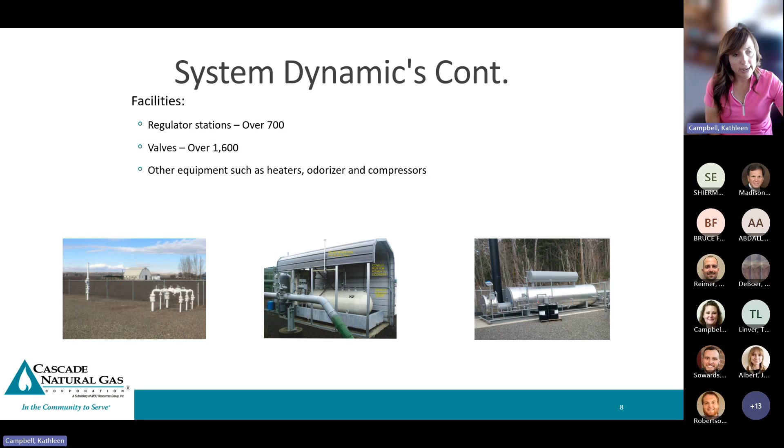In addition to pipe, we also operate a diverse range of facilities. So those facilities include regulator stations, valves, and equipment such as odorizers, heaters, and compressors. So here's some photos of some of the facilities, things we're doing maintenance on, also looking at sizing on, making sure they're meeting all of our needs.

And then to get us a little further into understanding our system, this is a high-level example of our systems and our dynamics. So this is very high level. In green, that is the interstate pipelines where Cascade Gas receives our gas from. Typically for Cascade, that's TransCanada or Williams Northwest Pipeline. From those, we have gate stations. They're basically taps off the interstate pipelines. At those gate stations, Cascade Gas takes over pressure regulation and will odorize the gas. And those systems feed our distribution system. So it's the start of our system.

In red, those would typically be our high pressure lines. So downstream of gates, we typically have high pressure lines. And those high pressure lines will feed our regulator stations, which feed distribution systems, which are in blue. That feeds our residential and commercial loads. And then also we can have some industrials, and those can be either off high pressure systems or off the distribution system. So that's just a high level look from our tap all the way down to the service on your house.

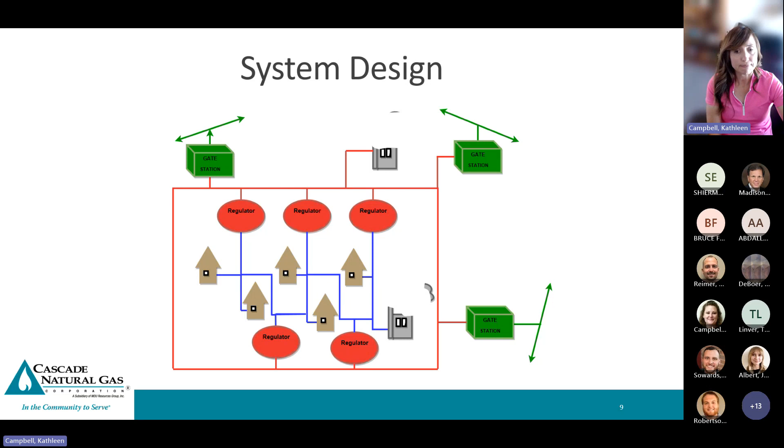The main tool we use to model our distribution system is Synergi Gas. This model is supported by DNV. Our Synergi Gas models incorporate our total customer loads and all of our piping and system configurations, which would include regulator set points, size of those facilities, things like that. Synergi Gas is an industry-used hydraulic modeling software that predicts flows and pressures on systems based on gas demands. Typically we use them for peak weather events, but you can actually use Synergi to model any weather event. And we'll go over some of that.

And then for Cascade Gas, our models are really important. So we rebuild them and validate them every 3 years, and then we maintain the models between rebuilds. So a great tool and resource that we put a lot into to keep accurate. And actually right now we just completed Cascade's 2023 model updates. So for this IRP, we will be using Cascade's new models. They got rebuilt and validated, and they're getting used by engineering, and that'll be what we do our 5-year growth modeling with. So exciting news that we got the models in time for this IRP.

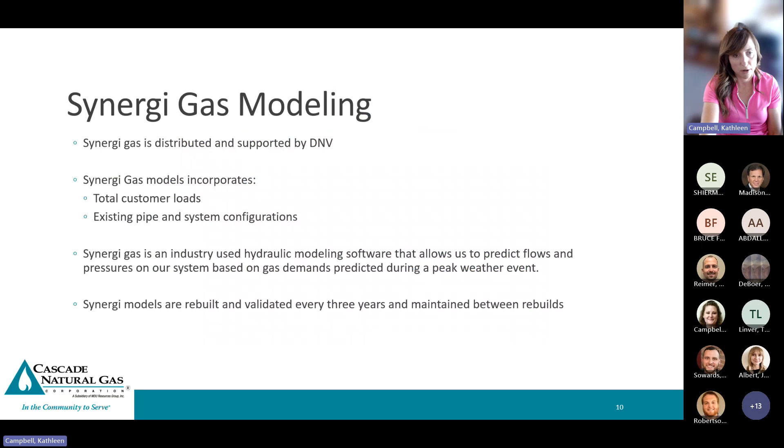And then this is that in Synergi. So you can see the reg stations, the piping, all the same. It feeds from GIS, so it's really accurate and up to date on everything that's been added to our system. And then one note I'll make is each of our systems are unique. They can be unique in the customers that are served and the pipeline characteristics.

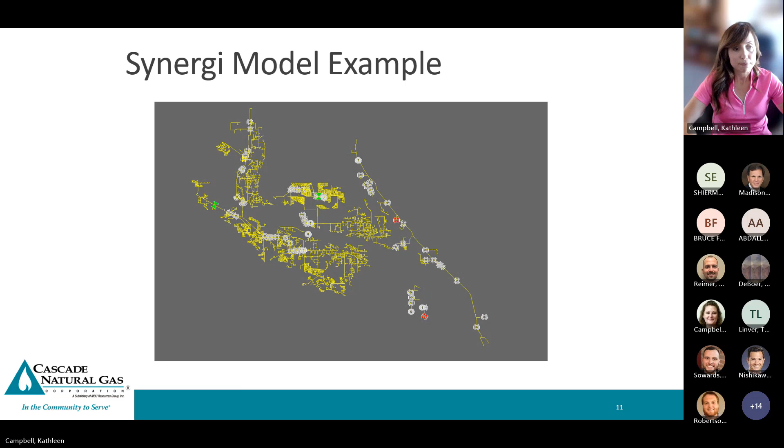Hey, Kathleen, just jumping in to let you know, 3 hands have been raised. So I just wanted to catch you before we moved on. Oh, okay, thanks. Let's pause. Go ahead, Byron. Hey, Byron.

I can't hear you. Is it me or did we lose something? Can't hear Byron either. Okay. I thought I maybe lost my connection. I was about to freak out. Can you guys hear me now? Did that work? Oh, yes. Yeah, we can hear you now. Okay, sometimes you just got to turn things off and turn back on again.

Okay. So Byron Harmon here from Washington UTC. I want to start by apologizing that staff didn't get its pre-tag feedback back to you guys in a timely manner. But could you go back to slide 7, please? Okay, sure.

So in previous staff comments, we had raised some concerns around hydrogen embrittlement with steel piping. I don't know what the literature says around polyethylene and hydrogen embrittlement. Is that a thing? Have you guys investigated hydrogen embrittlement with polyethylene pipes?

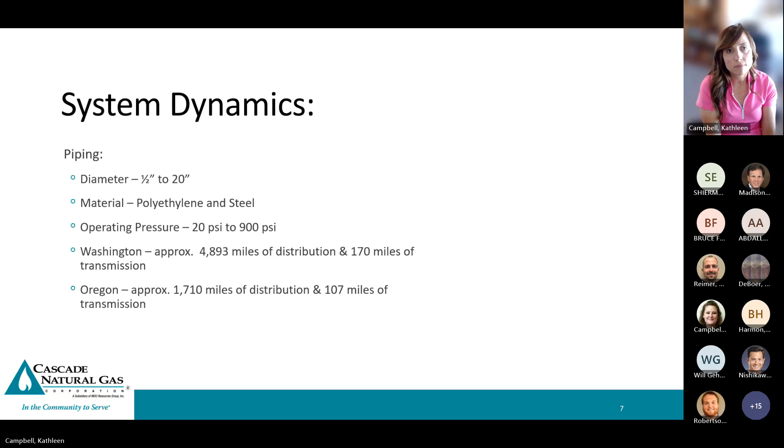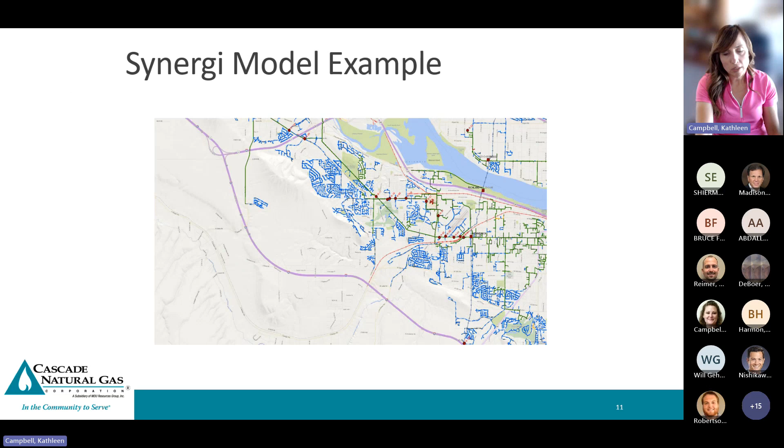I'm gonna try and figure out what slide we're on. Keep going. I think we're on this one. Yeah, I think we're wrapped up though.

So now we're going to get into our model building process and go over a little more detail on that. So when we rebuild our models, we take our current GIS data to do the spatial rebuild. We also export out our current CC&B billing data, and that data goes into a module called CMM, which is Customer Management Module, which is kind of a Synergi interface. The program takes our CC&B data to make an updated demands file.

And I'll touch on that a bit in the next slide too, but basically when we take the CC&B data, we take 5-year billing data. And in that 5-year billing data is up-to-date usage on the customer. So if the customer changed or their habits changed or their equipment changed, maybe they did some energy efficiency programs, things like that. So it's up-to-date billing, which is good. We want the best representation of loading on our models.

And then once we get that built and those processes done, we go through and we validate and calibrate. Validate and calibrate is kind of the same thing, but we validate each model to a recent low-pressure event. And we basically see how well our model that we built is performing to our existing data.

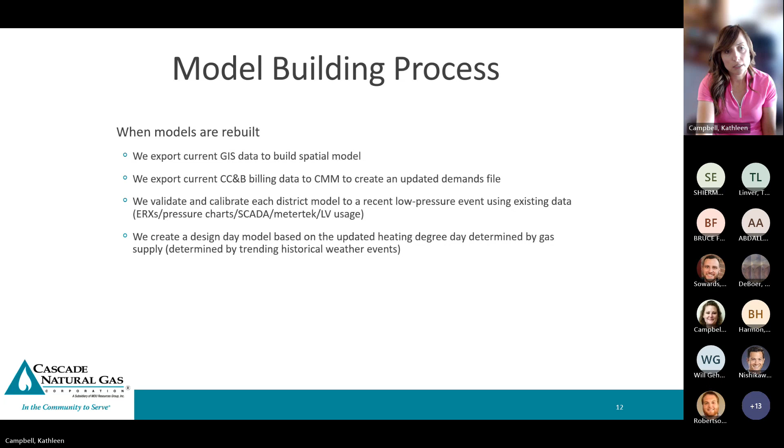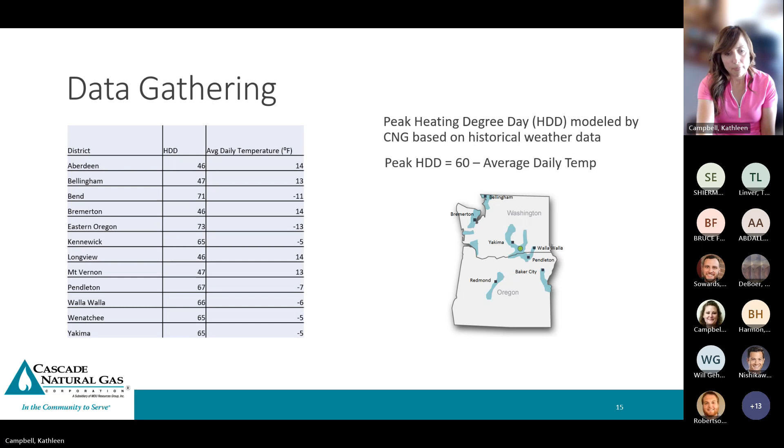And then with that, just touch on customer management module, CMM. So like we said, we get our CC&B data, it comes into CMM. It brings all our data in and basically makes the demand files. And those demand files apply the load spatially in the model. So in our Synergi models, some of it has to do with file size. We don't model each service line. We typically put service lines spatially into the pipe loads.

And there's just less data points. So when it goes to run, it's a little more efficient from a data management perspective, and it makes the program run faster. So that's what CMM does. We just put all of our meter demands into the pipes. And that's basically what CMM does for us.

There we go. So now we're going to talk how we get from a verified model up to a peak day model. So typically this load temperature relationship will come from CMM for us. And basically as your degree day increases, which means it's getting colder, you typically need more heat. Customers typically use more space and water heat. So as we get colder, more heat. And this is basically a linear relationship.

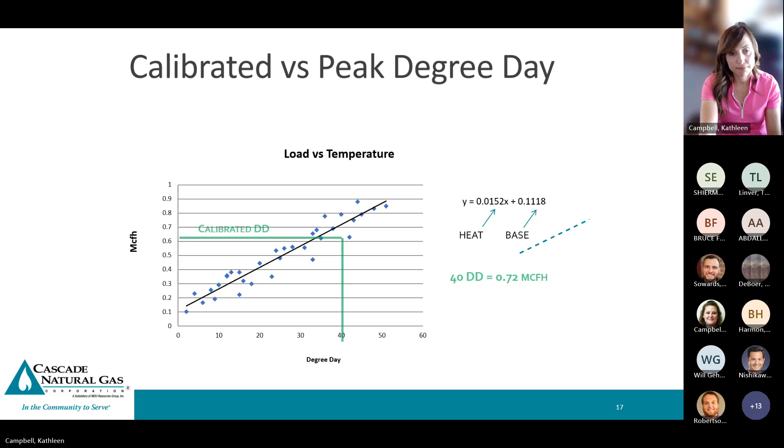Okay, any other questions? I was actually pausing because this slide normally gets a lot of questions, or we usually have good discussions on it. Okay. We can always come back there. So we were just getting to this one.

So with our models, we spend a lot of resources on getting our models really accurate, with the most accurate data we can have, rebuilding them frequently. And these models really are a great tool for us. We have lots of capabilities. Every day our engineers use our Synergi models. They review large customer requests. We model our RNG. It supports design and sizing of pipe and pipeline components.

We use them for future planning. We're going to use them to model our IRP predicted growth. We use them to identify the deficits. Operations support is another one on here, and system reliability. And then we optimize our distribution system enhancement options with the models. So it's a great tool and resource.

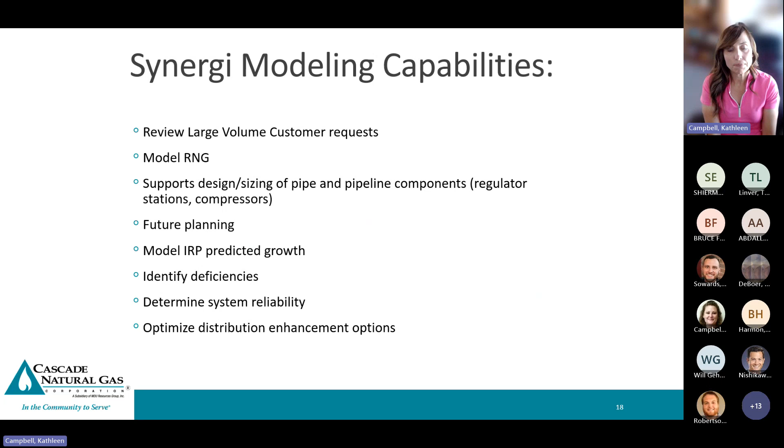And then I'm going to touch on demand side management. We've kind of talked about this, and maybe this slide is out of order, but it's okay. Since we're going to model out our 5-year growth, that growth includes energy efficiency programs, or if we have some demand side management planned, that would be built into our 5-year predictions. Also, any energy efficiency or demand side management efforts that have been completed would be incorporated when we rebuild the models.

So with that window of looking back and getting the most recent 5 years of CC&B data, you capture your energy efficiency programs or other efforts, or if customers changed equipment or whatever happened on the customer side for their usage. Another thing is it could be considered as an alternative to address a deficit. So we could also model demand side management in the Synergi models.

And then I've got an update. This one's kind of exciting. Renewable natural gas modeling update. Kathleen, we have a question on the last slide. Oh, yeah, go ahead. Sorry about that. The way that you described it just now, and I want to make sure I'm not misunderstanding, it sounds like a lot of your growth predictions are based on historical data. Is that accurate?

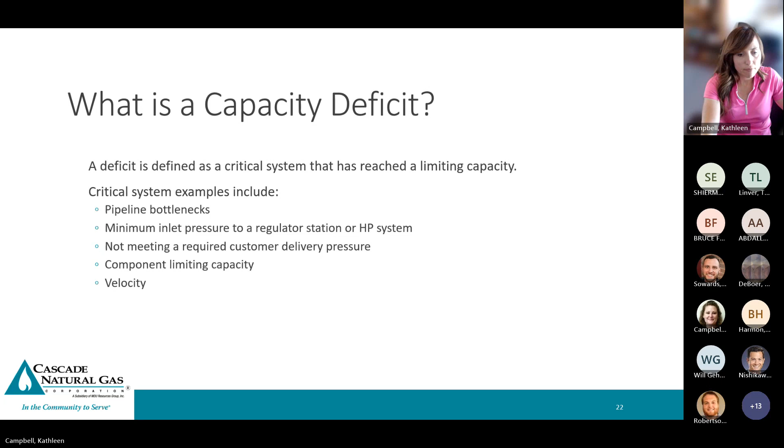So this actually is the growth modeling, what I'm just going to cover. So this kind of builds us into our deficits. I think I mentioned this. I think this might be the one we come back to, and there might be a question. We'll see where we go. I'll present and then we can see if there's questions.

So we model out our 5-year growth predicted, kind of like we were just talking with Brian and our philosophy on that. So we take that 5-year growth that we get from regulatory, and then we add that to our design day models to determine if and when a capacity deficit exists. And then I'll get into this a little bit.

So I think this was the question I'm recalling: you were asking if we had negative forecasts, and how Cascade's growth predictions have changed over time. In some of our areas and towns, I know I've seen we have had no growth, or the prediction in 5 years is the same as what it is right now. I can name one of those as well.

I think Othello. So the Othello gate was one of them I noticed, and it's kind of becoming more common, it's happened in the last couple years. It's been kind of surprising to see no growth in certain areas, for whatever reason, economic, lots of things play into those. But yeah, does that work, Brian? Before I move on to the next bullets, we can talk about that too.

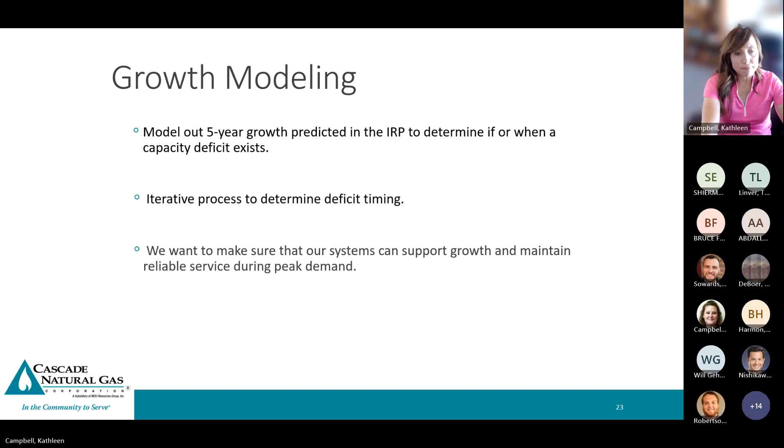And really the whole goal of it is to make sure we can support all of our growth and just maintain our reliable service during our peak demand events. And then with that, once you put the growth models on, like I've been mentioning, we do our system review. We do a comprehensive review every 2 years as part of the IRP. And then we also do yearly reviews with our budget cycle, so typically we're doing reviews on an annual basis also.

And then if any deficits are predicted, we evaluate, propose reinforcements and enhancement options, and go through alternative analysis. And then typically we'll work with management to get those into the capital budget based on the timing needs that we've determined with modeling. And next, now that we've covered the point that gets us to the alternatives, I'll go over our options and our alternative analysis in more detail.

So with enhancement, we've kind of talked about this, but here are some of the options for pipelines. This is just to get everyone talking the lingo to set us up for our next meeting. We have things called reinforcements, replacements, loops and backfeeds. Could be pressure increases or upgrades. Typically, these will gain capacity. We can also upgrade facilities. That might be replacing the whole facility, replacing a part in the facility, things like that.

Another option we have is we can always add reg stations to a distribution system. Typically, a reg station is a fresh source of gas. On distribution, they typically will serve 60 pounds. So if you have a system, let's say the east side of town has low pressure, if you run a reg over to the east side of town, typically you can boost pressure productively by adding another reg station, having a fresh feed of 60 pounds into the system, or a loop, with 2 regs feeding the system too. You can also do strategically placed gate stations, and you can also add compressor stations where feasible.

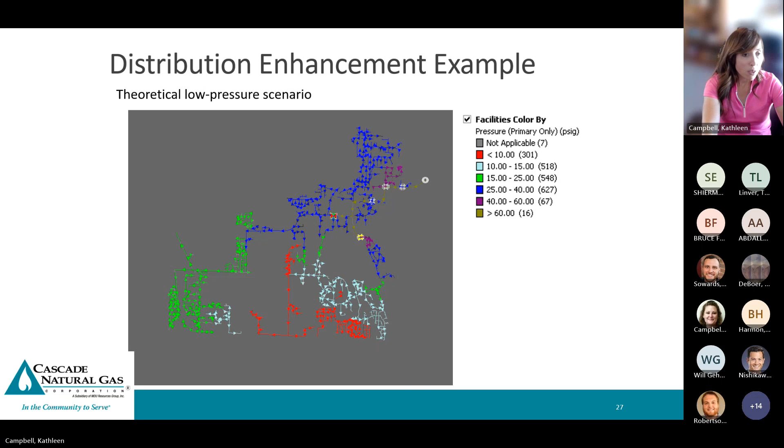So both the regs I noticed are on the east side of town. One option, if you brought a reg over to the west, that would probably help it. Or even to the south. Or you could do some looping. So you can go through, and this slide's animated. Some things might be unfeasible, like I noted a compressor station. So regs, there's the two regs. What can we do? Here's some pipes. So these are two good piping loops.

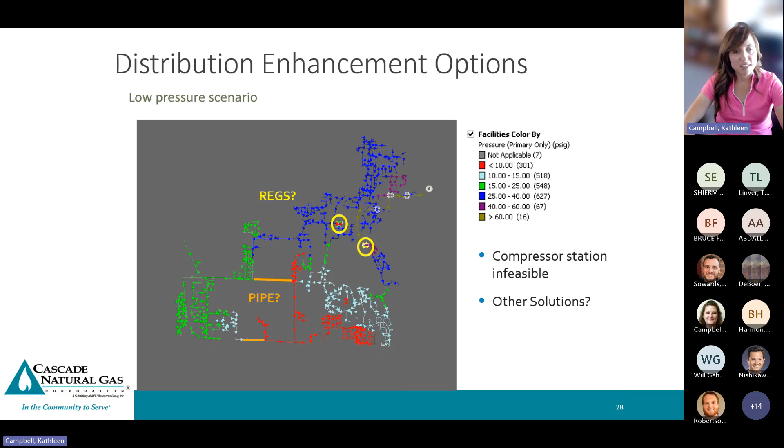And I guess with Synergi and our engineers, things might work in Synergi, but one thing we always want to be careful of is that it's constructible. So in this example, the middle pipe looks really good, but it actually runs through an airport. So things can work in Synergi, but they also need to work in the real world too.

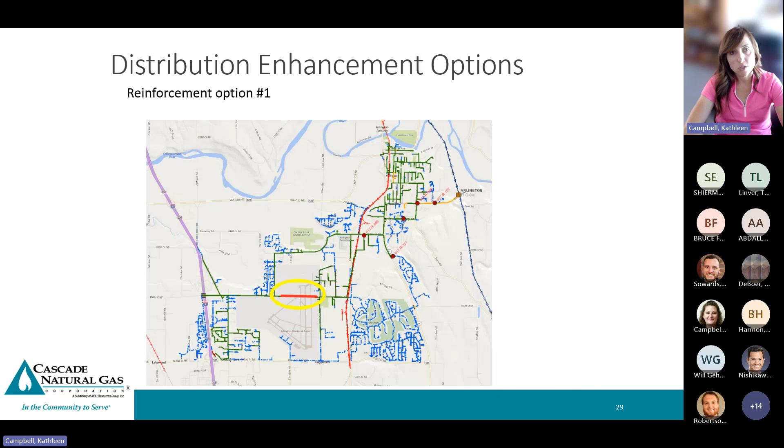So as we go through alternative analysis, we typically model out some things and then we'll look into if they're constructible, practical, and go through our alternative analysis criteria, which we'll be covering in a minute. But a good example here. So in this example, the lower loop is constructible, so that would be the option you would choose.

And then it's important that we don't want to overbuild areas. So you'll notice we just brought this back up above 10 pounds. So whatever your design or your deficit goal is, we want to do the least cost option.

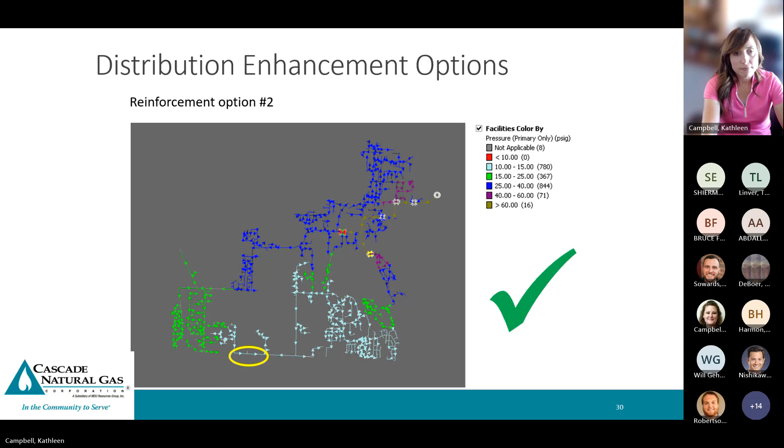So that works through the example, but once we have those deficits identified and we have a couple options modeled, we'll go through how we do alternative analysis, and we'll look at scope, cost, capacity increase, timing, system benefits, maybe long-term planning comes into play. Work through alternative analysis and then also environmental impacts.

So environmental impacts could be things like if the pipeline route goes through wetlands or an archaeologically sensitive site, things like that you maybe want to avoid. And then each enhancement option will have different pros and cons. So we weigh them out. And there might be several factors why you select one alternative over another.

So now I'm going to cover how we review and select projects to our capital budget. Hey, go ahead. Kathleen, we have a question. Okay. So Byron here again. Going back one slide.

Has Cascade started looking at how to develop any equity enhancement considerations? So looking at demographics of communities that are impacted, property owners, renters, or for example, equity-based environmental impacts. So if a particular community might be overly burdened by a compressor or something and they happen to be a historically marginalized community, does that factor into any of your analysis? Have you guys started looking at those sorts of things?

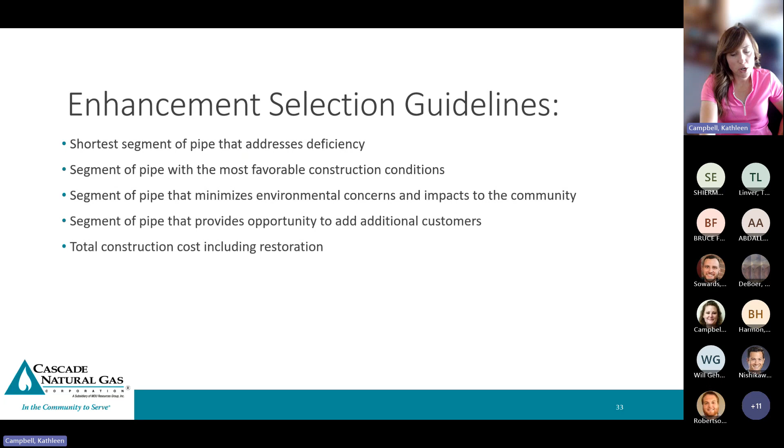And another example of district information would be roads. With some of the growth going on in our territory, a road might be going to 5 lanes or something, and it might be a good opportunity for us to get a project, or we might have to move a project, or like I said, some of those bridge projects. So some of that's incorporated too. Maybe you move somewhere else, or maybe you can abandon the feed.

But yeah, once we get all that knowledge in, we get it into our models and into our minds when we're doing our alternative analysis, and we'll identify our system limitations. And then from there, a lot of our engineers work collaboratively with our managers and directors on project selection. So we'll typically have our alternatives listed out, and this is what we'll be going through in the July meeting, but we'll share all the alternatives considered, some details on the alternatives, different pros and cons of each one.